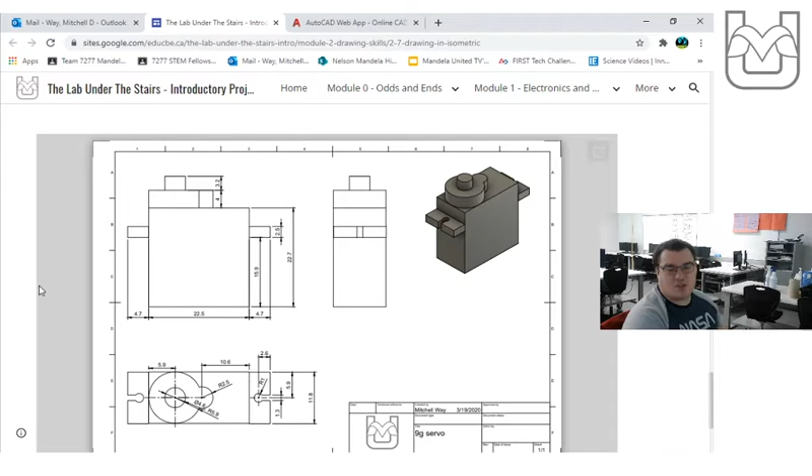So let's go to AutoCAD. Very quickly, I'm just going to drop a drawing layer in here so we can see what we're drawing. I'm going to take this drawing and throw it over onto my other screen so I can actually see what I'm doing and have all my dimensions in front of me. Okay, with that being said, let's get this party started.

When we start drawing something in isometric, we are going to start with the major piece that we're going to work with. I'm going to start in my draw layer, and in this case that's a rectangular prism. I'm going to keep my properties here, start my prism, and draw it to 30-degree angles.

Now, you guys remember I've done most of my tutorials in Web App, but there is the ability with the Restrict Cursor to Specified Angles button down here at the bottom that's going to allow me to set my angles to my snaps to 30 degrees, which is exactly what I'm going to do. I like 30s because they let me draw isometric very easily.

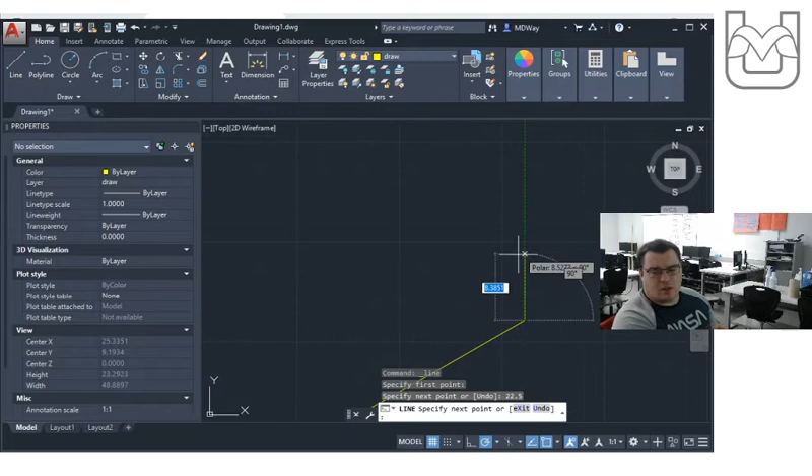Now, I know that in this drawing I've got a 22.5 unit, I think millimeter, long section on the bottom of my servo. The height of the servo overall is going to be 22.7 millimeters. And then relatively easily I can just use my ortho snaps to finish off that front plane. That part was easy.

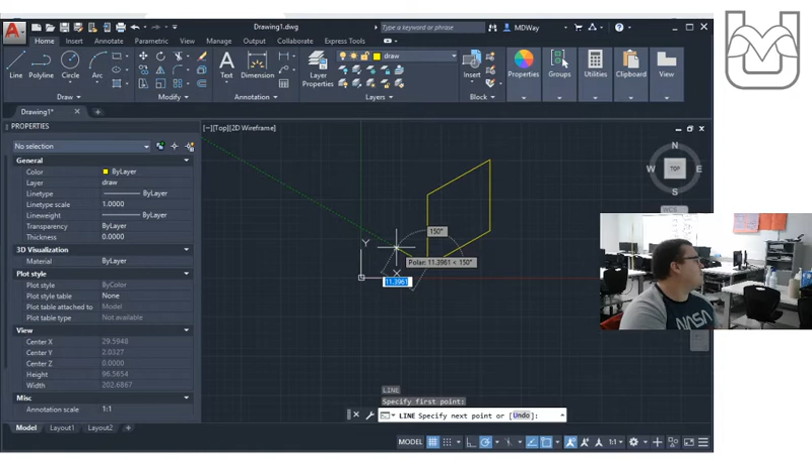We're going to draw the piece back here, and the servo is going to be, I believe, 11.8 millimeters deep here, and again I can just use my snaps. Oh, it's not going to give me that one. Okay, 22.7, snap back, and I'm just going to finish off the... come on, you can load AutoCAD, there we go. I'm just going to finish this off at 22.5 and finish off. Okay, there's our first rectangle. Life is easy on that one.

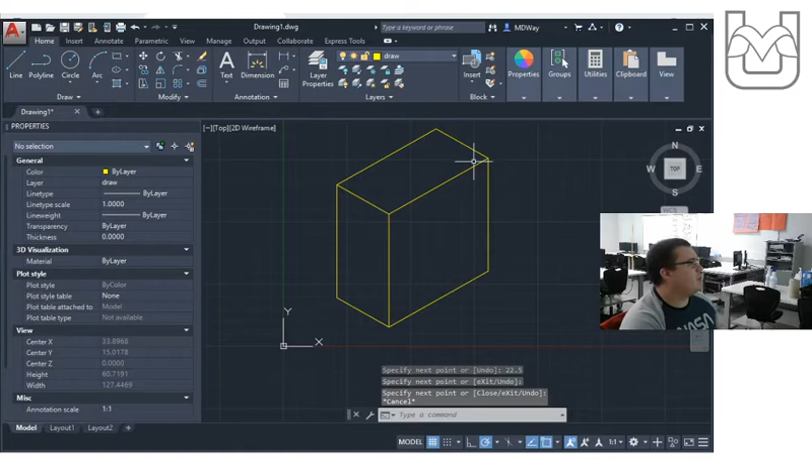Now, the next pieces of this that we need to draw are going to probably be these wings on the bottom, because we may as well be doing that while we're here fighting with a rectangular prism for right now.

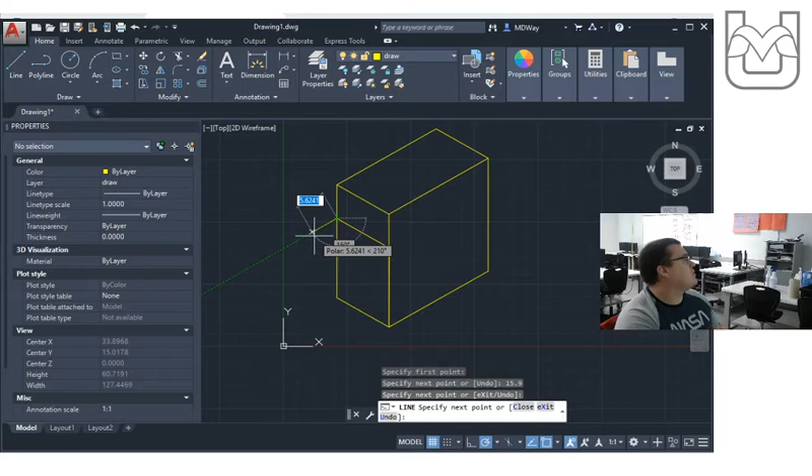Very quickly I'm going to take—I know that these start 15.9 units up from the bottom here, and I'm going to use a construction line for that. I'm going to draw the entirety of the rectangular prism as if I could see through it, because it's going to make my life relatively easier. I know this is 4.7 units out, and it goes back across by the width of the object here, which is 11.8.

Now, that's the bottom edge of the rectangle, and I'm going to show you a trick here. We're going to use a left to right select to actually select that, and I'm going to use a copy, because this is where this gets fun. I know the top of this is 2.5 millimeters tall, so if I copy it and go straight up 2.5 millimeters, I can actually draw the other piece of it.

Don't want to do that. I can actually draw the other piece relatively easily and just kind of fill in the gaps for what would be finished there, just like that.

Now that I'm looking at this, I can see that this line is one I would never see, and this line too, so I can just trim away those pieces. Trim, enter, okay, enter, and I take out the pieces of the line I probably would never see on this particular drawing. There's my one wing, relatively easily.

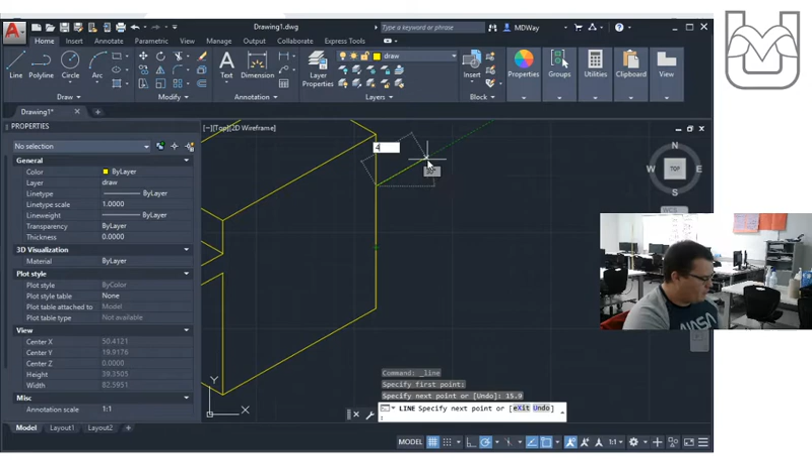Now the other wing I can do in the exact same way if I want to. It's actually not that hard at all. I take the construction line 15.9 up from the bottom, go out at a 30-degree angle. I know this thing is 4.7 millimeters out, and it runs straight across at a 30-degree angle.

Now, if I look here, this is where it gets kind of neat. I know I'm not going to be able to see the rest of this box, so I'm literally just going to stop it right there. I'm going to draw my line up, and I have choices here. I could take this and do the copy thing again, no problem.

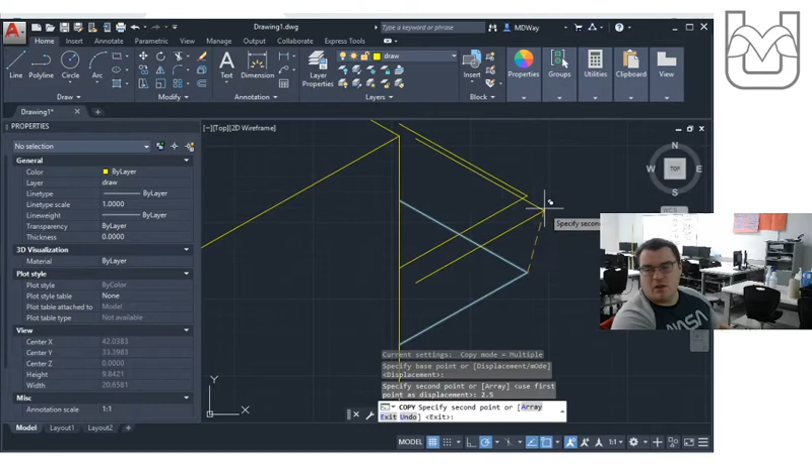Copy it up 2.5 millimeters. That's relatively easy. That's actually showing me that the top of this top line here is going to be visible, so I'm going to redraw it.

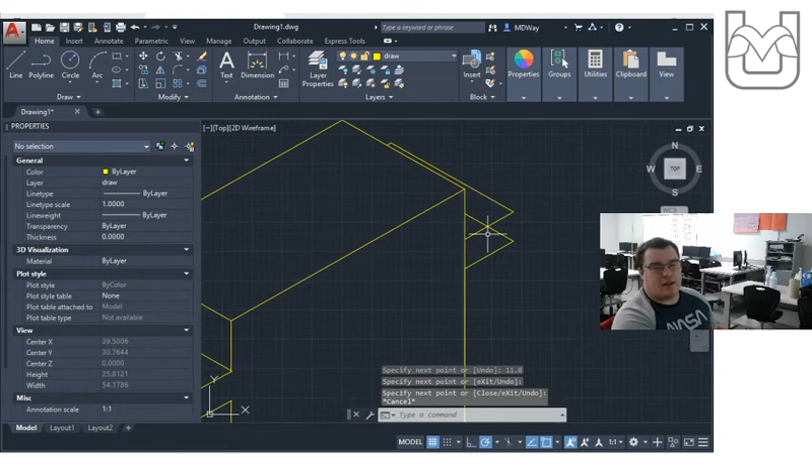I'm going to draw it out, and I know it's going to be a length or width of 11.8 based on the drawing. I know it goes back at a 30-degree angle, so I can draw it there. It's kind of hidden, mostly out of the way. Finish my line here, realize this line will never be seen, delete it. There's my other wing.

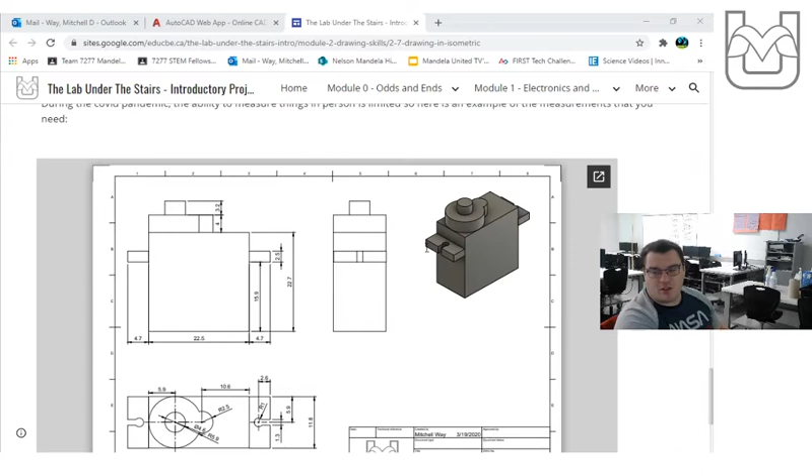That's relatively easy. Now this is where it gets weird, because we're going to be dealing with cylinders. The next part of this drawing is the slightly more difficult piece of putting these cylinders on top. I'm actually going to finish the cylinders on the bottom here, and probably this one too since it's relatively easy. So let's start on these cylinders on the top.

I know that a cylinder is just a circle with a circle on top of it. That's really the external geometry if I'm building a wireframe. So let's go back here and draw the first big circle. Based on my drawing, the first big circle is centered in the middle of the servo, has 5.9 millimeters from the edge, and has a radius of 5.9.

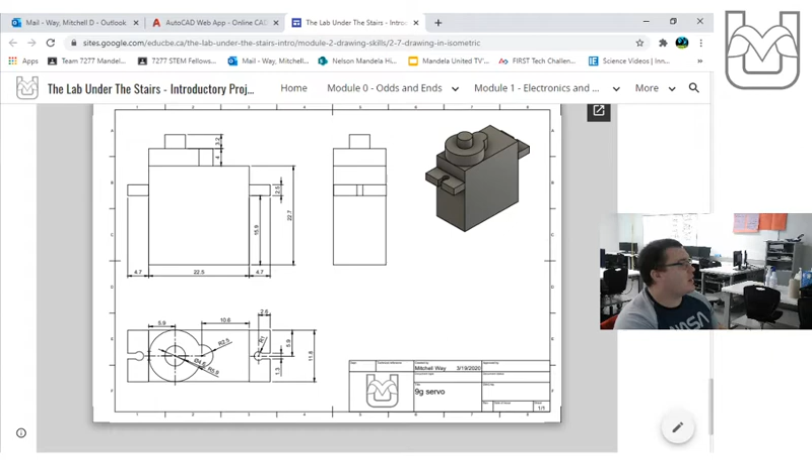That means this left edge right here is going to be lined up at the center point of the side of this rectangle, which is going to help me later. It's going to make my life a little bit easier. So let's actually go ahead and draw this thing.

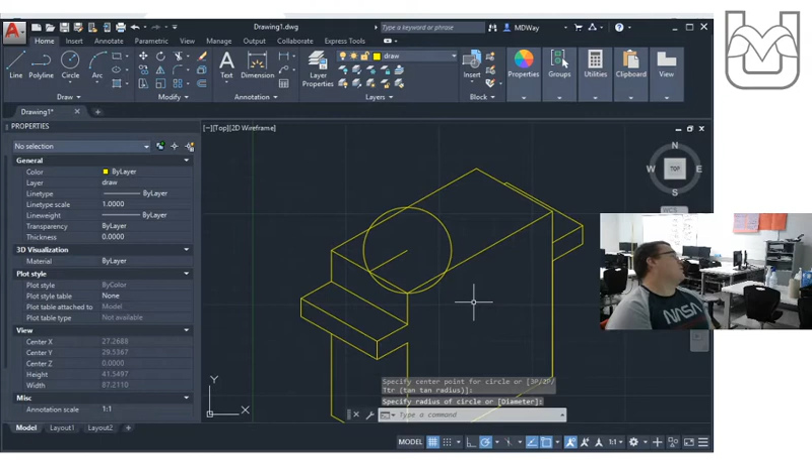Now, if I put a circle here, I run into this problem. I'm going to put the first line here, at an isometric 30 degrees, 5.9 units in. If I draw a circle right to the edge, you'll notice it doesn't work, it doesn't quite look right. That's because in isometric, that circle would have been kind of rotated off to one side.

It sits more flat, it's not an actual circle, it's what's called an ellipse. And you guys have run into ellipses before, I'm pretty sure.

Now, in order to do an actual ellipse in AutoCAD, we have to do something kind of weird. Right now, notice my grid in the back is just straight up XY direction. I have to go down here to this tool called isometric drafting, and apply an isoplane to this. If I put isoplane left on it, notice my cursor looks like it's going to draw something on this plane of the servo. If I go isoplane right, it wants to draw something here, and if I go isoplane top, it looks like I want to draw something here.

Now my circles I want going in isoplane top, and I want to actually draw something called an isocircle. So I'm going to go over to my ellipse, and I'm going to go elliptical arc right at the bottom.

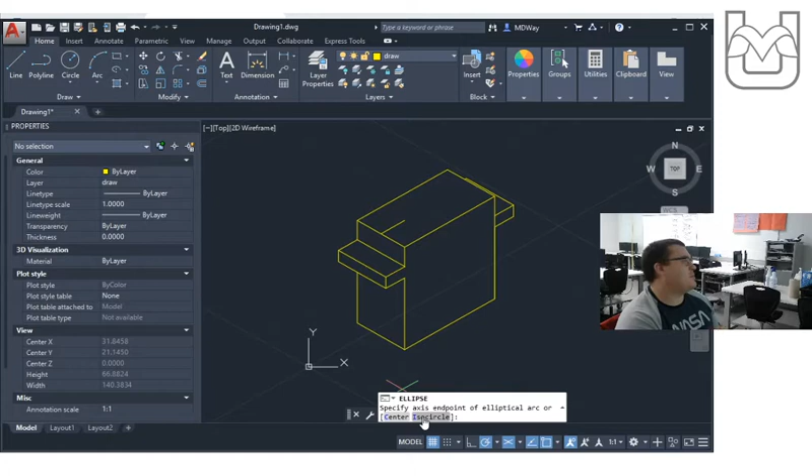Notice at the bottom it gives me the option of drawing an isocircle. When I click isocircle, it says specify center. I'm going to click the center, and then I'm going to draw the radius of the isocircle out to that point, which is the edge of this particular servo motor.

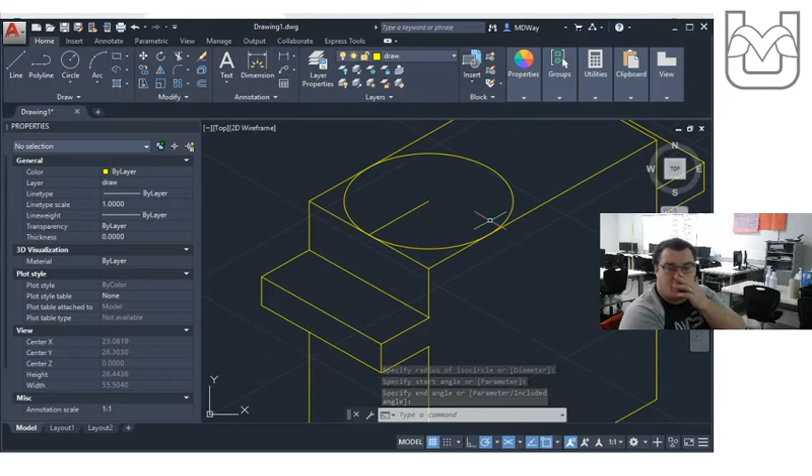Notice that when I click there, I've got to click there a couple times to finish off if I want to do a full circle. That's going to give me a circle that is in isometric. Notice how that looks right, like a circle would be in this actual drawing.

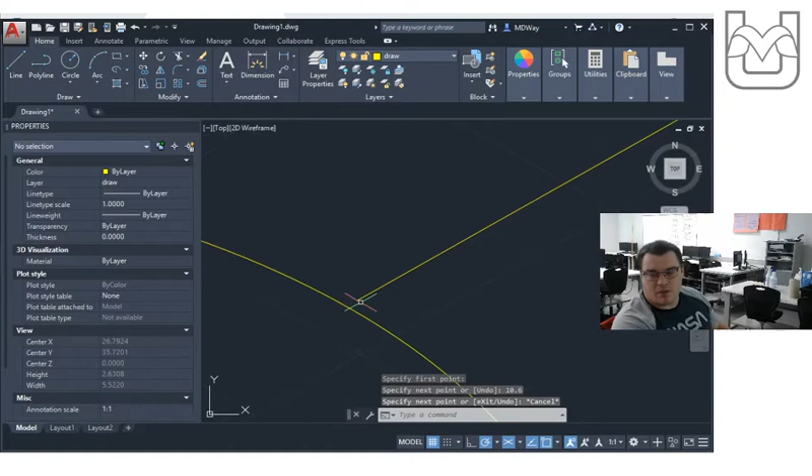Now we're going to draw the second circle. The second circle is a bit smaller. If you follow your drawing, it is going in this direction, 10.6, that direction. Notice that this line doesn't quite line up with that line. They're close, but not quite.

So I'm again going to go to my ellipse tool. I'm again going to click here, and oh sorry, I did not click isocircle that time. Isocircle, there we go. You click on the end of this, and I'm going to draw out an isocircle. This one has a radius of 2.5, so we're going to go 2.5 for the radius, and we're going to draw it in there.

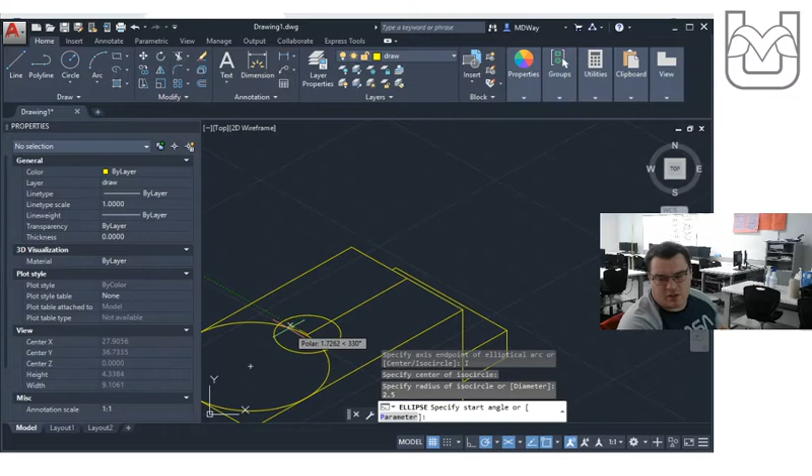Notice that my next thing is I'm actually specifying the start angle. I'm just going to pick an angle, and then it says specify end angle. I can draw a partial circle, but I want a full circle, so I just draw it that way.

I'm very simply going to delete the lines I don't need using a trim command. I can make them go away. And now I have the base of this circle.

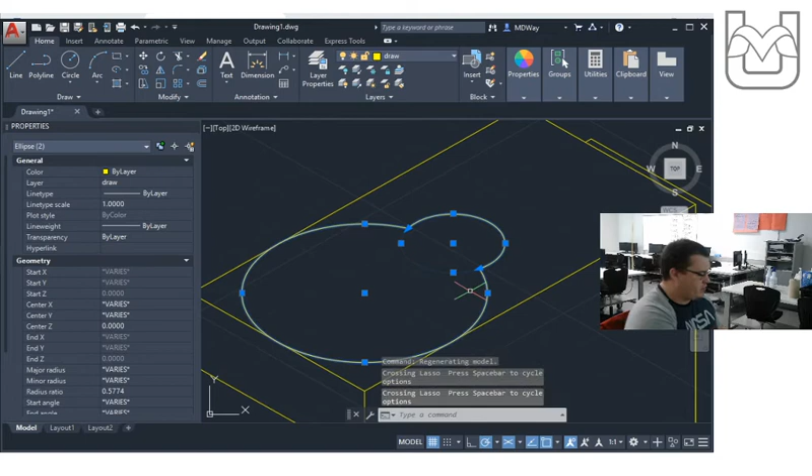I'm going to use the exact same thing I used on the wings. I'm going to actually just copy it. I'm going to pick a base point in the center here, and copy it its exact height, which is 4 millimeters.

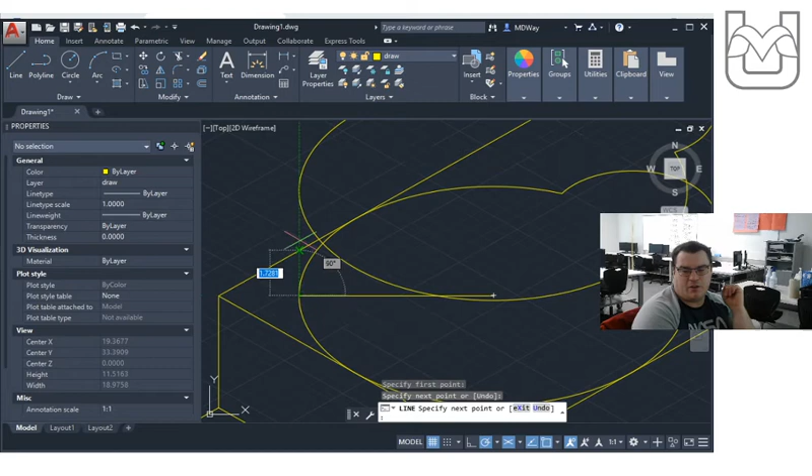Now in reality, if I'm looking at this particular object, this is where this gets a little bit weird, because this is a cylinder. Right now you're seeing what's called a wireframe. The cylinder itself looks kind of weird because we're actually going to see the edge of the cylinder going in a line straight 90 degrees horizontal right now to each of these circles.

I'm going to go to this circle too and do the exact same thing. Notice that I just create a construction line to make sure that I get right to the 90-degree tangent to this. Okay, there we go.

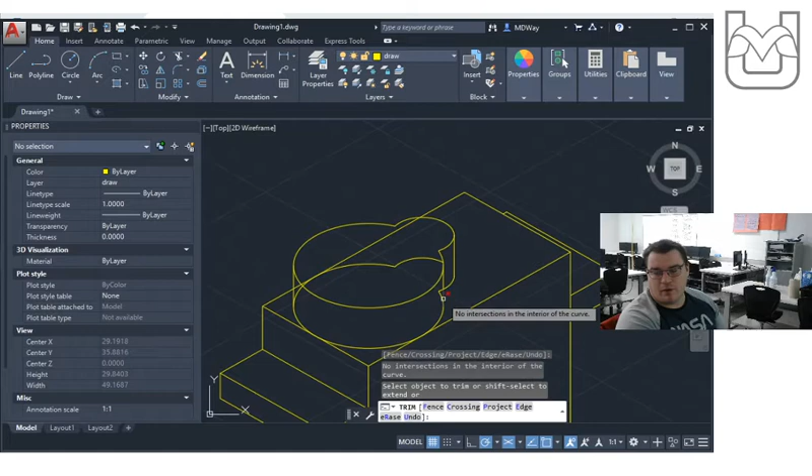Now this is just a matter of trimming away the parts that we no longer require. There, it's going to take those out, we're not going to see them. We can't trim that line because right now it doesn't actually intersect with anything in this drawing. If a line doesn't intersect, it can't be trimmed because there's nothing to cut it with. Now what we have is the actual top of this servo.

The last piece is really easy to do because it's just a circle on top, and I'm just going to draw it out. It has a diameter of 4.6 if I'm looking at this correctly. Start in the center.

Oop, didn't click Isocircle again. My bad, let's do it right. Okay, here we go, 4.6. Okay, love it, that was a radius, we didn't want a radius. Let's try it one more time with an Isocircle.

Here we go, this time the radius, if it is 4.6, is going to be 4.6 or 4.8? 4.6, okay let's go 2.3 on this one for the radius, there we go. Start angle, end angle, oop, that didn't quite work. I'm going to extend this and see if I can just quickly fix it. Nope, cannot, time to redraw.

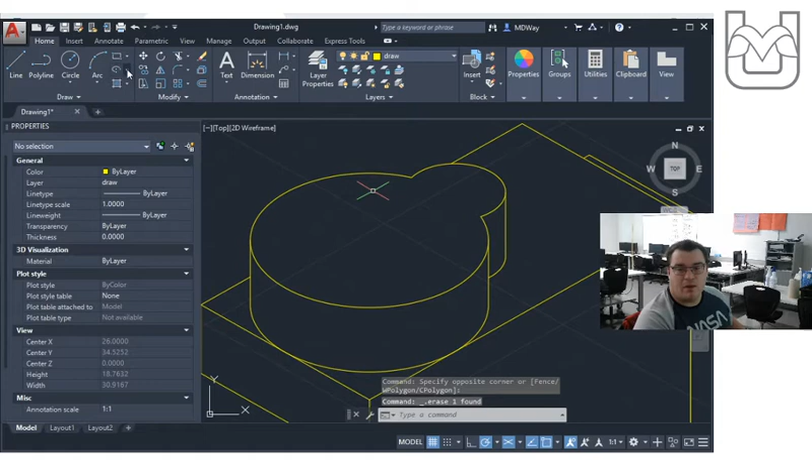Do it one more time. Apologies, let's do this properly. Okay, I said 2.3, and we said we were going to specify the start angle, we were going to specify the end angle, there we go.

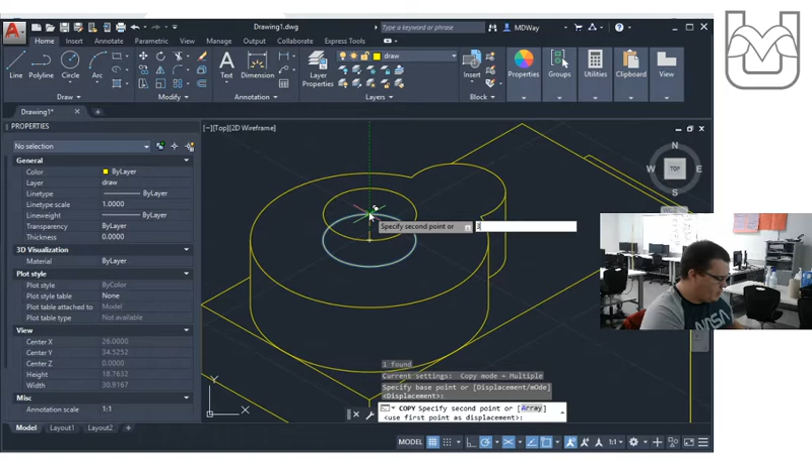I know from my drawing that this thing is 3.2 units high, so we're going to copy it, and we're going to go straight up 3.2 units, and then we're just going to finish off our lines so we make sure we get the right visible things, like so. Do some trimming, do some deleting.

There, and there, and there—I actually have to zoom in to find this last line that I'm going to delete. And there's most of your servo motor done.

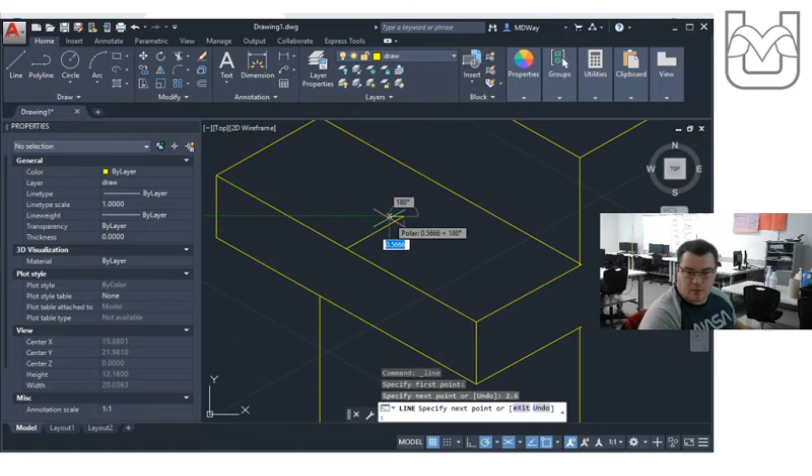Okay, I'm not going to walk through how you do the wings. I think that should be a challenge you should try to finish yourself. But I'm going to quickly draw them. I'm not going to talk our way through them because that's going to make life a little too easy for you, I would imagine. But all the skills you've already used here will definitely apply in this particular drawing.

Off this side, it is 0.65.

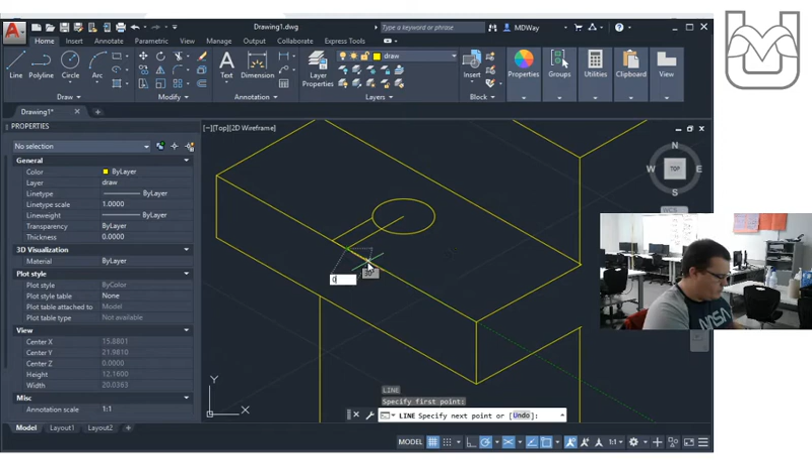Again, all the pieces you've got are going to be relatively easy. Now, this is where it gets interesting, because drawing this in AutoCAD proper is not exceptionally hard to do. This has not been a terribly turbulent drawing necessarily—there are a few pieces of weirdness, of course, that you might have to redraw and tidy up.

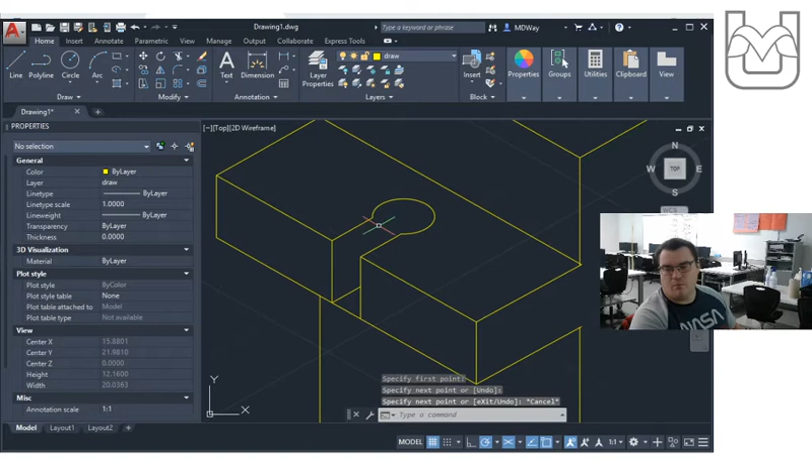But doing it in AutoCAD Web is a little bit harder, because AutoCAD Web was never really made to deal with ellipses like the ISO circle. So we're going to do a workaround. Let's talk about that workaround right now.

There's the front edge of your servo motor—that's how it's supposed to be done. Now, let's talk about AutoCAD Web, because that's where this gets weird.

I'm going to go to my test folder, okay? I'll show you the exact same thing, but the problem is there's no ellipse in AutoCAD Web. So my expectation for you is that you take and use the workaround I've kind of created for you.

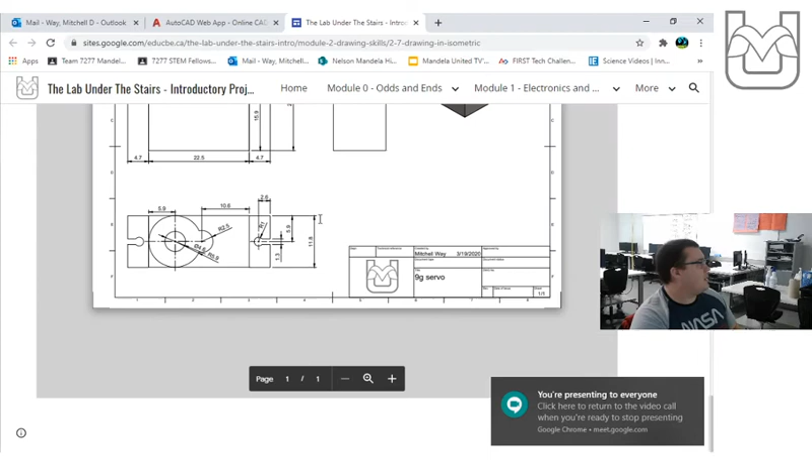If you go onto the main assignment page and float around here, oh, it looks like it has not yet published. Hang tight for a second—we may have to hit a publish button here to make this work. Apologies for that. Let me make sure it loaded properly. It did not. Okay, I will update the workaround on here. I did have it drawn in here this morning, but clearly didn't hit the correct button.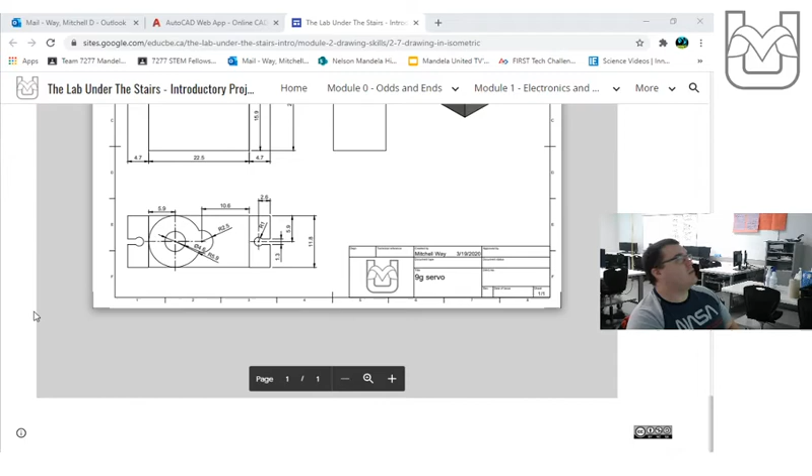Oh, here it is—never mind, I take it back. Okay, give me one moment to hit the publish button and refresh this page. All right, give the server a moment to update. Come on, Google, you can do it. Last try—there we go.

Okay, here's the workaround. In your assignment folder—no, let's not open Illustrator. In your assignment folder, I've actually left you a couple of files. The one you care about is the ISO circle top.

I want you to actually take it and download it, so you have it on your computer. We're going to do this version right now. Sorry, apologize, I accidentally opened something I wasn't supposed to open. It can go away—go away, Illustrator. All right, now we're paused. Don't you love it how software does that to you sometimes?

There we go. Okay, let's take our ISO circle and download it. From here, what we're going to do is take that downloaded DWG file, go into our web app, and upload and go find that file. Nice and easy, nothing complicated there. That's going to allow us to actually have access to that particular file, which is really something we need.

And there we go. Okay, cool. That being said, we now have that isometric top, and it's uploaded—I think I uploaded it. ISO circle top, right here.

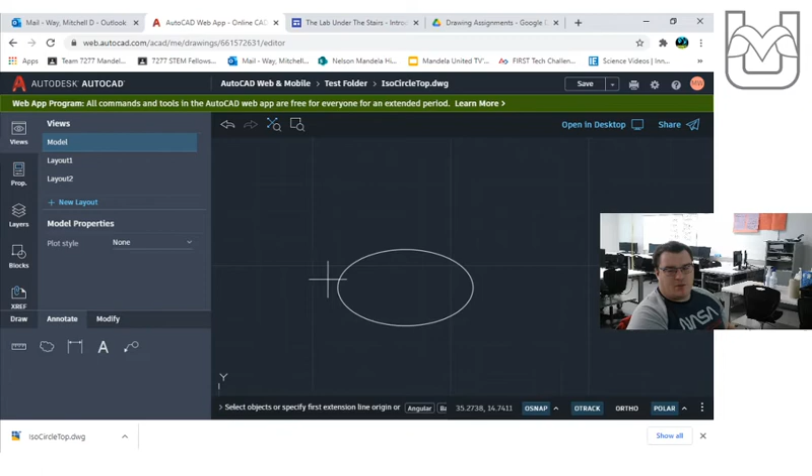Now, this is where this gets weird. If I open this file, okay, this is where it's nice—I actually have the ISO circle that we just drew, and I was nice to you guys. I turned around, and when I drew it, I actually created it with a radius of exactly 1 in the isometric direction.

How you're going to work with this is really simple: you're going to take this circle, take this file, and actually save it as your isometric servo. Okay, where's our save as? There's our save as. It doesn't seem to be saving as—interesting.

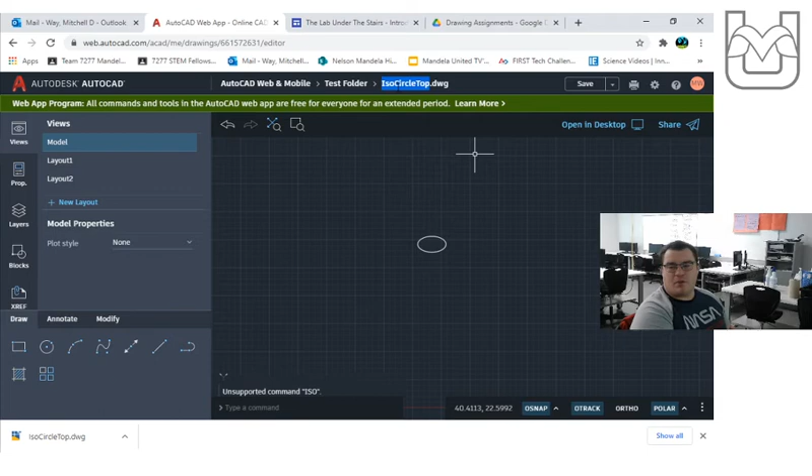ISO circle. No, hang tight for a second. I thought this would save as... I apparently was wrong. That is interesting. Okay, well, I guess you're doing your drawing in something called ISO circle top at this point. Such is life, we'll make it work.

Nothing wrong with that. That being said, how you're going to make this work is using another command we haven't really touched yet. I know that I've got this circle, and I know that on the top of my servo I'm going to need that circle. I'm going to turn my polar snaps onto 30 and do the exact same drawing we just did, just so we have something to work with and I can walk you through those pieces.

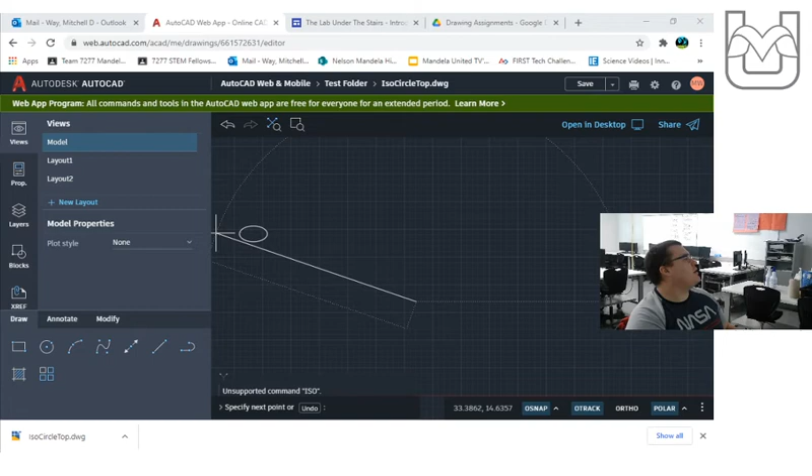I just have to quickly pop open the drawing I need to actually see the servo. There we go, okay, let's take this over. This is 22.5. I've lost control of my screen. All right, there we go. Okay, I'm just going to make sure I have a canvas to work off of, which is all this is, so that we can go.

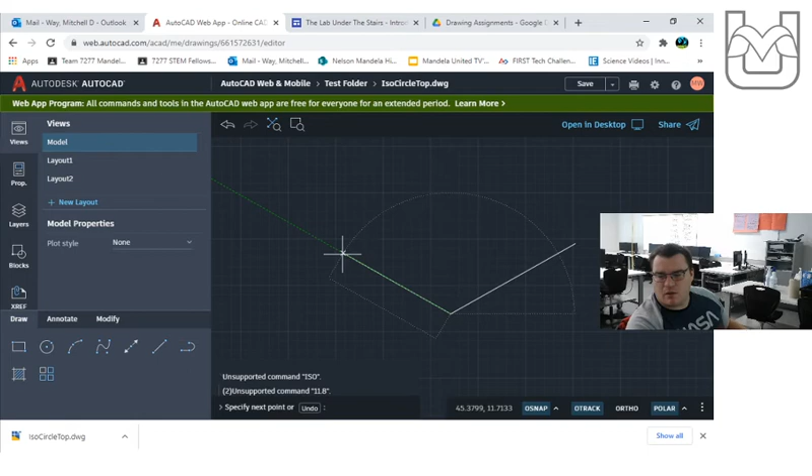Hang tight, guys. Appear to have turned off one of my tracking buttons here. Interesting. I'm trying to figure out what we've actually done here. Apologies, guys. Zoom window, test folder, ISO circle top. I may have to save this as something first. Hang tight for a second.

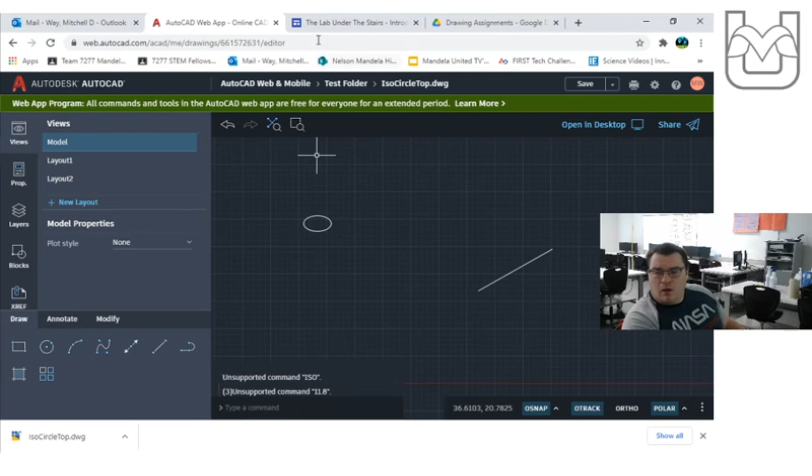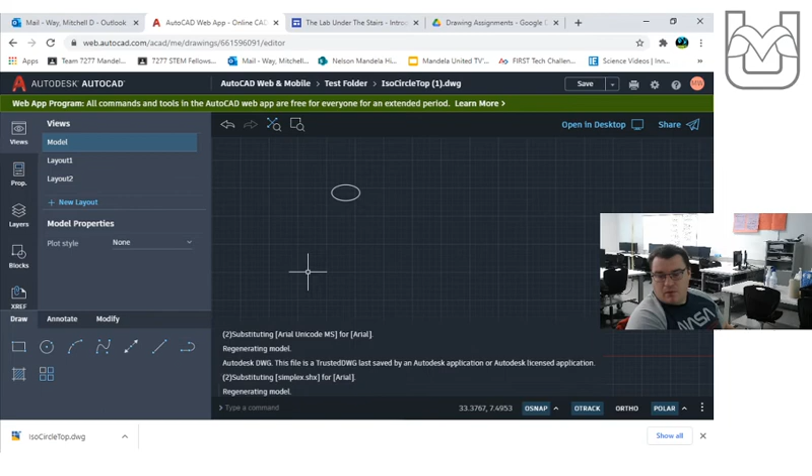I just want to see what options I have with this ISO circle. Okay, here we go, I'm going to duplicate it, and see if a duplicate version of it can be modified, because I think I'm running into a file type problem here, oddly. Okay, let's see if we can edit this one. I just want to make sure I can draw on this one just like I normally would. Hey, here we go, we appear to have fixed it.

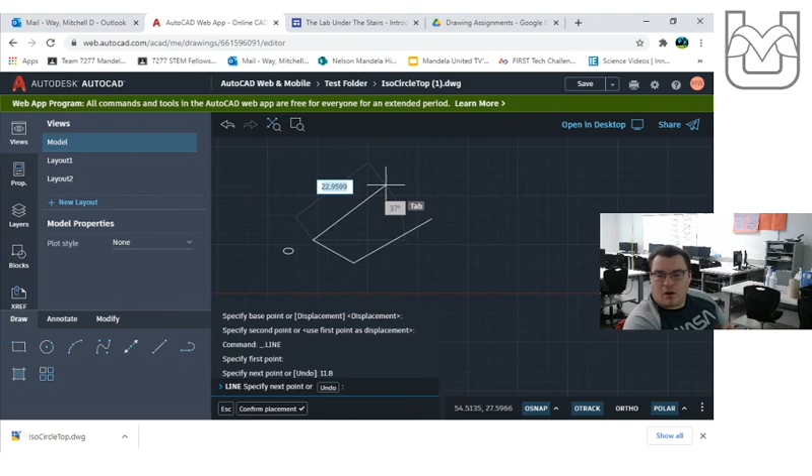22.5. Okay, good, bye. I'm just going to move this circle out of the way so it's not around, and then I'm going to quickly put the rest of my drawing together. Apologies for the delay, guys, we'll make sure we get this to work in AutoCAD Web here. 22.5, just 22.5, there we go.

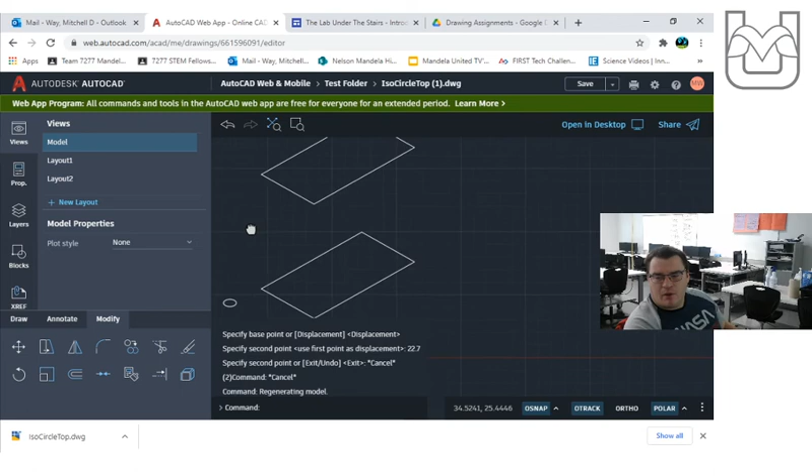I'm going to use the same trick I used before, and just copy this straight up the height of the thing, which is 22.7. Okay, and then I'm simply going to move my screen a little too far there. I'm simply going to finish off the lines that I would normally have here, meaning that line would be visible, that line would be visible, and these lines would be invisible, so they get deleted.

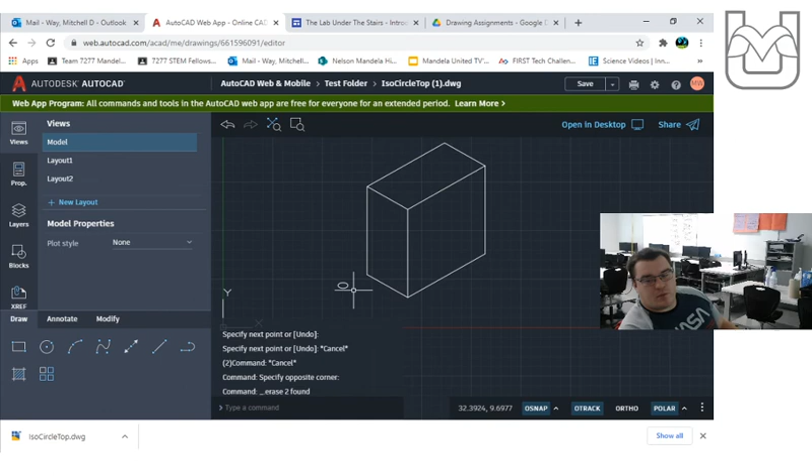Okay, now this is where this gets interesting. I want to reuse this ISO circle over and over again, so I'm just going to draw just the top of this, because you've seen me draw the rest of this drawing in AutoCAD Desktop. But in order to use this I now have to do something weird: I'm actually going to make a copy of this, and copy the ISO circle up here. But clearly that ISO circle is the wrong size, it's not what we need.

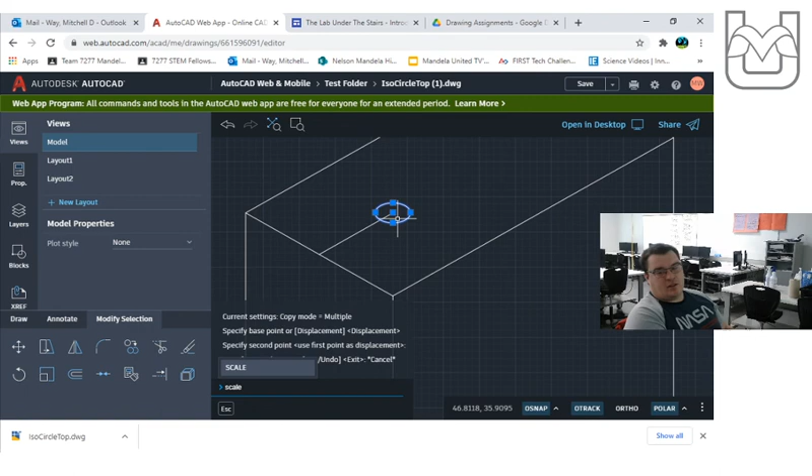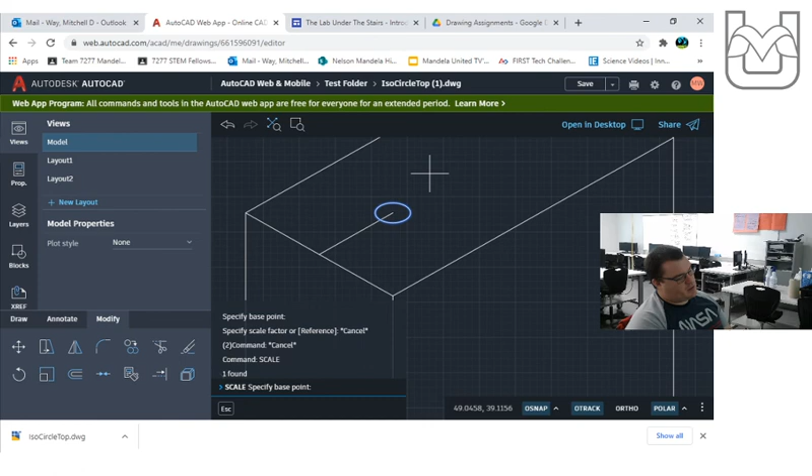So we're going to use what's called a scale command. Scale is going to allow us to make something larger or smaller than it normally is. In this case we want to scale it to a very specific dimension, so we're going to go scale, and we know right now it has a diameter of 2. We know that we want this to have a diameter of 11.8 if we're going by our measurements on our drawing. So we know that we have to scale this by a factor of, well, let's make the math easy — let's specify our base point as the middle, and let's make our scale factor 0.5.

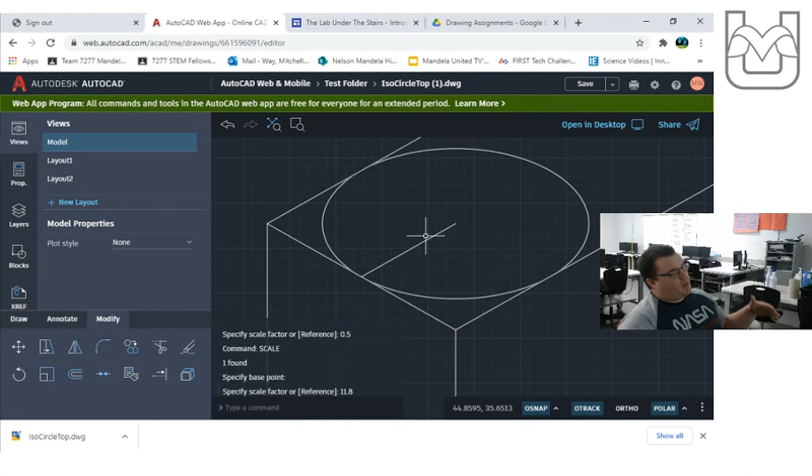Now I know that I have a radius of 0.5 and a diameter of 1. If I know that my diameter is now 11.8, I can very easily just take a scale command and scale it around the base point of the center, and scale it by 11.8. And that's going to give me a circle that's exactly 11.8 wide. A diameter of 1 at a scale factor of 11.8 becomes a diameter of 11.8.

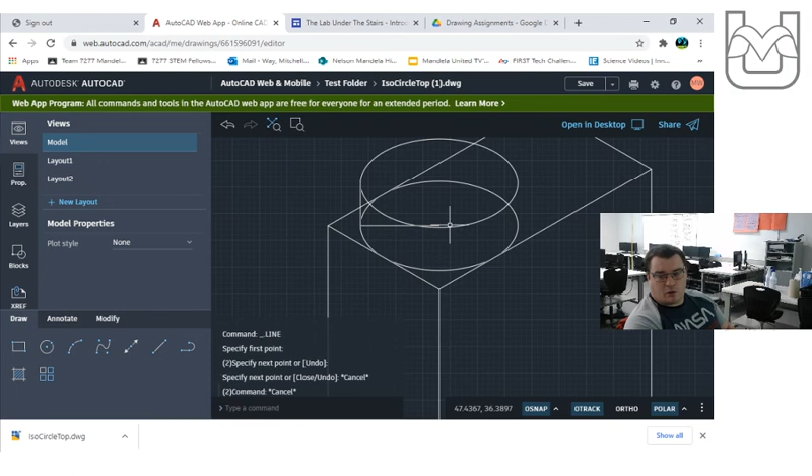That easy, okay? And again, this is going to work exactly the way it did in our other tutorial, where we can do pieces of this, we could displace things, we could draw the rest of the cylinder, and you can actually finish your servo motor in relatively short order, putting it in raw 2D isometric.

Now, if that all makes sense, I'm going to stop the recording on the video here, but that should give you enough information to actually get the drawing of your servo motor complete, and I'm hoping put together with your orthographic and exported. I'm going to stop the recording right now, and we'll go back to the chat.